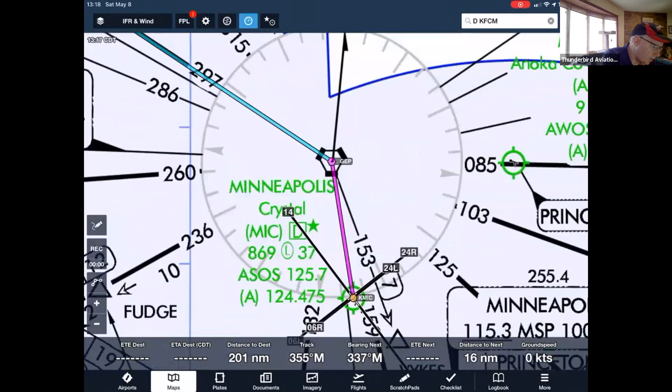So, going to the map, taking off out of Crystal Airport, going direct to Gopher, and then out Victor 2, which is the 297.

So, if the weather is like it is right now at Crystal Airport, where it's 10 miles and clear, and we take off out of Crystal Airport. Well, maybe back up a second. And what the winds are doing, 130. So we're going to take off runway 14 at Crystal Airport, which means we're taking off and going towards the southeast.

We're cleared for takeoff by the tower. We get about 500 feet in the air. Tower goes, fly runway heading, expect on course in 10 minutes, contact departure. When we try to get a hold of departure, we don't hear anything. We've gone through the whole troubleshooting thing, and we still don't hear anything. So we realize that we're radio out.

And so what do we do if the weather is 10-mile visibility and clear of clouds? And there's no clouds in the sky. So now we go back to the route, go back to the regulation. The first part of the rule is if you're VFR, you maintain VFR and land as soon as practical.

So we're going to turn around and head back towards Crystal Airport, get ourselves set up for downwind to runway 14, and hope to see the correct kind of light gun signals when we get on final. Hopefully what we're hoping to see is a steady green light on final, which says we're cleared to land. If we see a steady red light on final, that means give way to other aircraft, continue circling is the official term, but basically it means do a go around, stay in the pattern. You'll probably get the green light on the next time around.

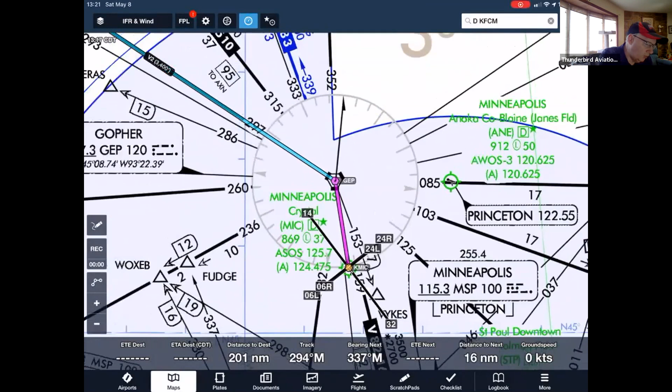Since we're off route, the altitude options are: minimum altitude for IFR operation, altitude to expect in a further clearance, or the altitude that we were assigned, whichever is higher. We were assigned 3,000 feet. We have not been given an expected further clearance altitude. The filed altitude of 4,000 feet doesn't work here. Now we got to figure out what's the minimum altitude for IFR operation where we are right now.

So we were heading southeast away from Crystal Airport. Now we're turning around to go back to Gopher. We are not on any Victor Airways yet. So now we have to look on the en route chart for the OROCA altitude. The OROCA altitude are those brown numbers that are in the latitude and longitude quadrangle.

So for where we are right now, the off-route obstacle clearance altitude is 3,600 feet. Our assigned altitude is 3,000 feet. So at this point, we're going to climb up to 3,600 feet as we head direct towards Gopher.

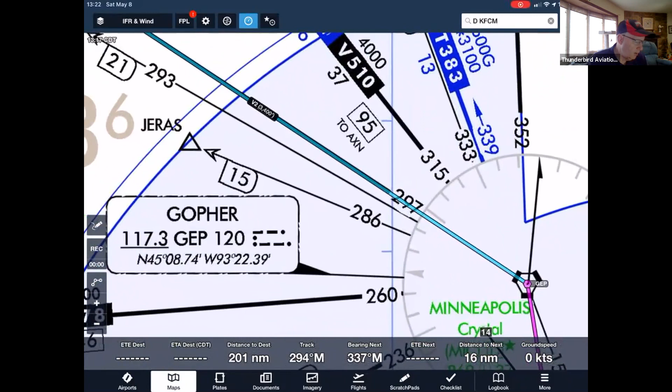Then continuing on our route and altitude situation, when we get to Gopher... there we go. So when we get to Gopher, we're going to start on Victor 2, which is flying out the 297-degree radial away from Gopher. And once we get on the Victor 2 line, we've got to make a choice again.

We're on the route now. We're flying direct Gopher. Now we're on Victor 2, heading towards WIRDE intersection, wherever that is. And now we got to figure out what altitude to fly.

Now that we're on a route, our minimum altitude for IFR operation can either be the MEA or the MOCA. Right now, on this portion of the route, all we have is the MEA. If you notice in the upper left-hand corner, we have 3,400. The numbers without the star next to them are the minimum en route altitude, the MEA. So our MEA, our minimum altitude for IFR operation now that we're on Victor 2, is 3,400.

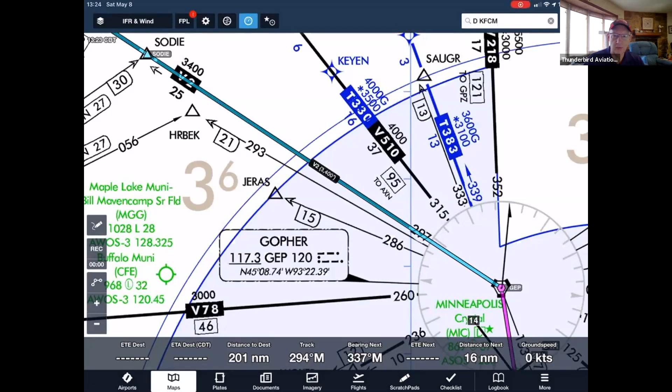We still don't have an expected altitude. Our assigned altitude is 3,000 feet. So once we get onto Victor 2, we're going to descend out of 3,600 feet down to 3,400 feet. We're going to maintain our route on Victor 2 at 3,400 feet, going past all these intersections as we fly along here. And then we get to Alexandria VOR.

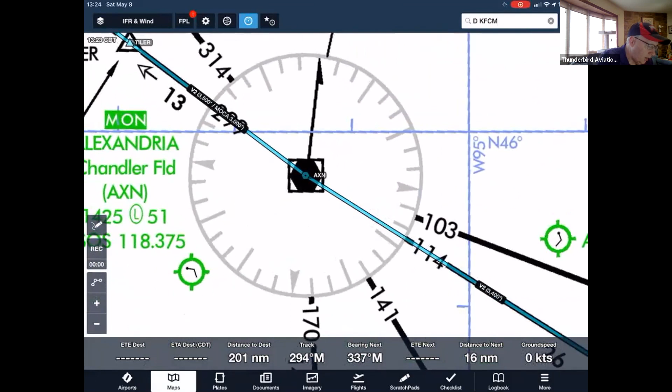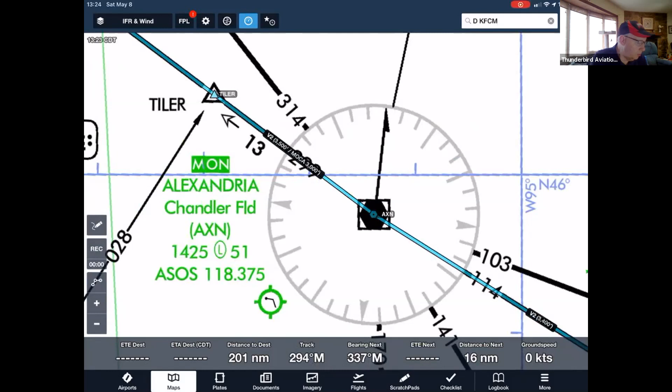Getting to the Alexandria VOR, we're going to continue on Victor 2, but on the other side of that, in the upper left-hand corner of our screen, now we have two choices of altitudes to continue on with Victor 2. The number on top, 3,500, is the MEA. The star number underneath it, 3,000 feet, is the MOCA, the minimum obstacle clearance altitude, which gives us obstacle clearance and nav aid reception within 22 nautical miles of the nav aid we just passed. In this case, Alexandria.

So our assigned altitude is still 3,000 feet. So could we choose 3,000 feet to fly since both those numbers are exactly the same? The way I interpret the rule is you would want to go down to the MOCA if there's a reason for you to go down there.

Just after you pass Alexandria, you look out the window and you're out of the clouds, but then you're back in the clouds. If you go down from 3,400 feet down to 3,000 feet, you're going to get into VFR conditions. You can remain VFR and land as soon as practicable, just like the reg says.

Then I would go down to 3,000 feet, with the situation we have right now where the assigned altitude is only 3,000, so the numbers end up being the same. But if the ceiling in Alexandria is still 500 feet overcast, there's no reason to go down to 3,000 feet. You might as well just climb right on up to 3,500 feet because you're just going to continue on Victor 2.

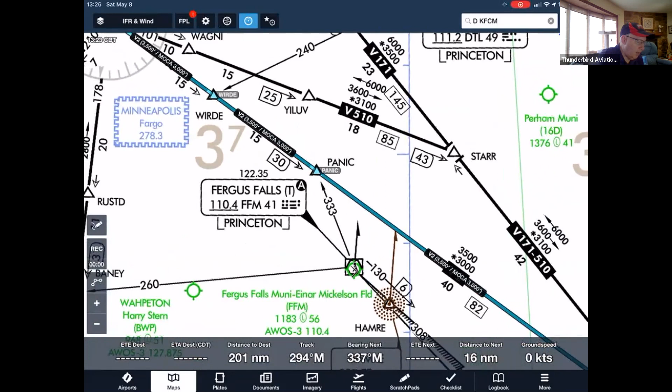As we keep traveling to the northwest, past Panic intersection, and then finally, right there in the bottom of the screen, WIRDE intersection - Whiskey India Romeo Delta Echo. That is our clearance limit.

We did not get expected further clearance after that. So if you look at all the approaches into Fargo Airport, WIRDE is not on any of them, so it's not a point from which an approach begins.

So now we have to go to the second part of that clearance limit rule. It says if your clearance limit is a point from which an approach does not begin, then if you've been given an EFC, you have to hold at WIRDE until the EFC time.

According to everything we've been talking about in this scenario, we have not been given an EFC time for WIRDE. So we don't have to hold at WIRDE - we can just go right past it.

But now, what are we going to fly past WIRDE? Because that's our clearance limit - we don't have any more assigned route left, right? So we don't have an assigned route anymore, and we had not been given an expected further clearance route at any time before the radios died.

So now this is where you would use the filed route. From WIRDE, you're going to continue on Victor 2, go to the Fargo VOR, and then figure out what to do from there.

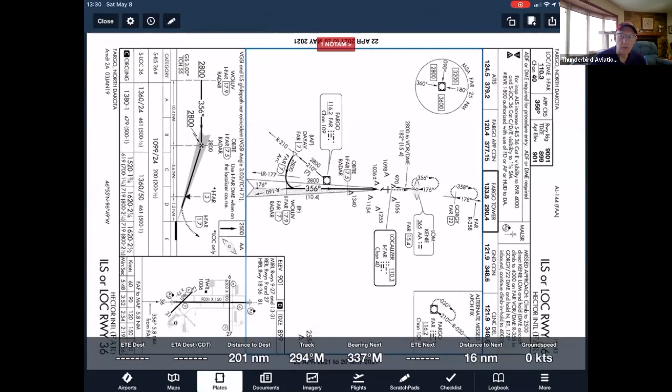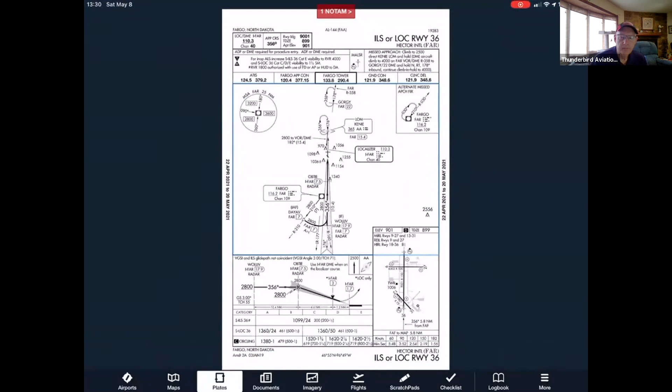So in this situation, I would pick the ILS to runway 36. Let me scoot this around a little bit so we can see it better on your screen there. So there we are.

If we decide to do the ILS to runway 36, then now we're at the Fargo VOR, what are we going to do? Well, obviously we're going to take the 210 radial out of the Fargo VOR, go out to the 7 DME arc, or go out to 7 DME and arc back towards the localizer. During all this time, we're setting up all the appropriate frequencies and everything we need in order to be able to fly this approach.

But what altitude are we going to fly after we get past Fargo? The 2,800 feet there is not part of the approach. The approach starts where the line becomes thick on the approach plate there. The thin line is not part of the approach. So now we still have to work with our altitudes that we have to worry about before.

So the minimum altitude for IFR operation at this point from Fargo out to DAYAV is 2,800 feet, but we've been assigned 3,000 feet. So since our radios aren't working, at this point at Fargo going out to the 7 DME arc, we're going to fly at 3,000 feet.

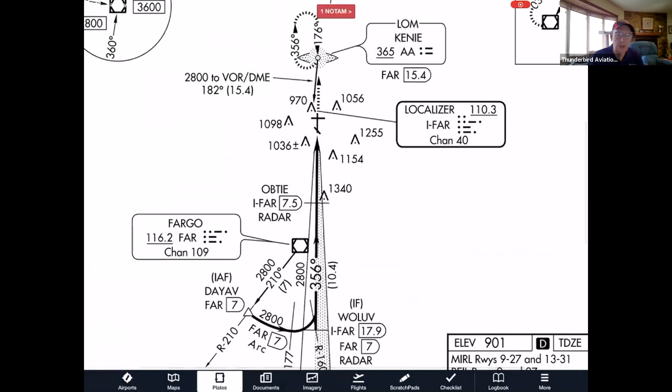Once we get to DAYAV and turn onto the arc, then we can go down to 2,800 feet. Fly the arc around until we intercept the 356 degree on the localizer and go down here to the bottom, maintaining 2,800 feet till OBTIE intersection, which is both the final approach fix for the localizer, the Maltese Cross there, and the ILS final approach fix, which is the lightning bolt symbol next to the 2,800 foot there.

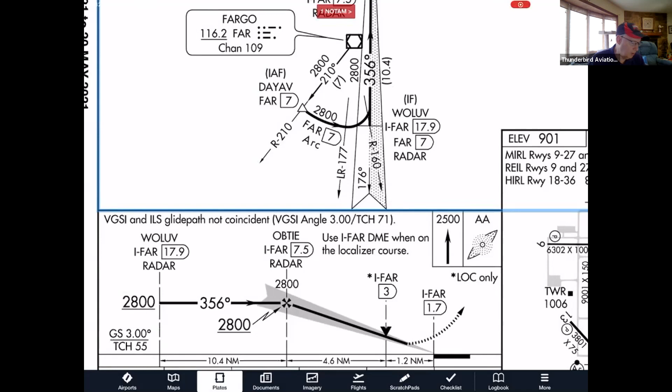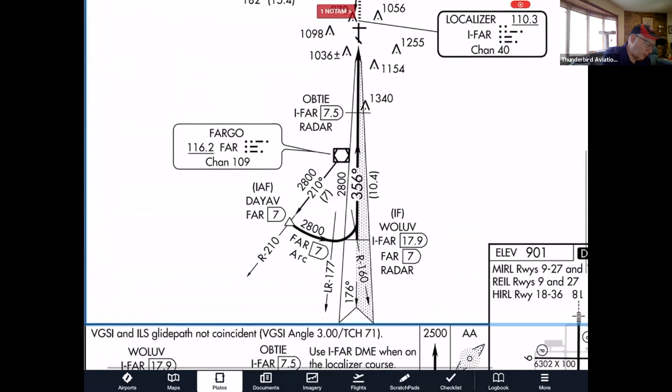So at OBTIE, we're going to start on down from 2,800 feet, after intersecting the glide slope, following that altitude all the way down to the straight-in ILS minimums of 1,099 feet. So we've been doing our very, very best to maintain the big plus on the gauge there, so that we're on localizer and on glide slope, and we're all the way down to 1,099 feet. Now what?

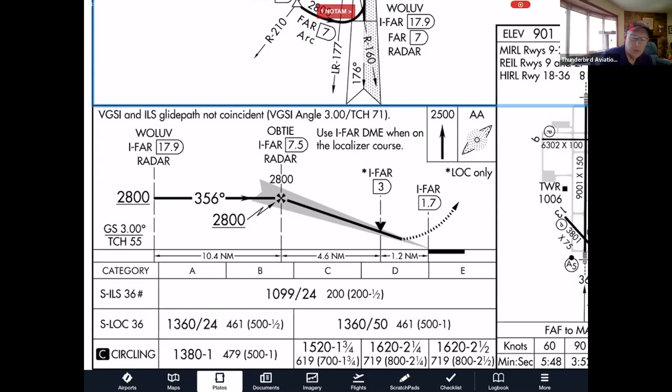So need to switch back here.

So now we're at 1,099 feet at Fargo Airport. Now we have to figure out, can we land? Can we descend below our decision altitude or the MDA? So 91.175 is the regulation that talks about takeoff and landing in IFR situations. But the first part of the regulation talks about the landing part rather than the taking off part.

So the first thing we have to realize is we must be continuously in a situation where, using normal maneuvers and normal descent rates, we can descend on down to the runway. That's what the reg says. In the airline world, they have a different sort of term for this. They call it a stabilized approach.

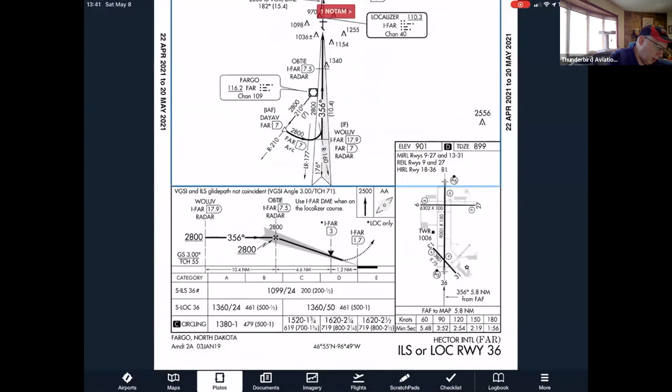So let's go back to our Fargo situation here and see how we apply this rule to the situation. So here we are coming into runway 36 at Fargo Airport. So we see approach lighting systems labeled as an A5.

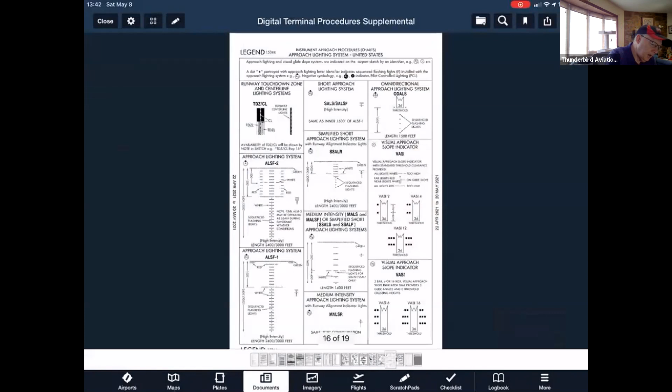Stand by a second. I'll refine my situation here. A5, according to the explanation in the front of the approach plate book, is a medium intensity approach lighting system with runway alignment indicator lights, nicknamed MALSR. Well, what do the lights look like? Well, they look the same as SSALR.

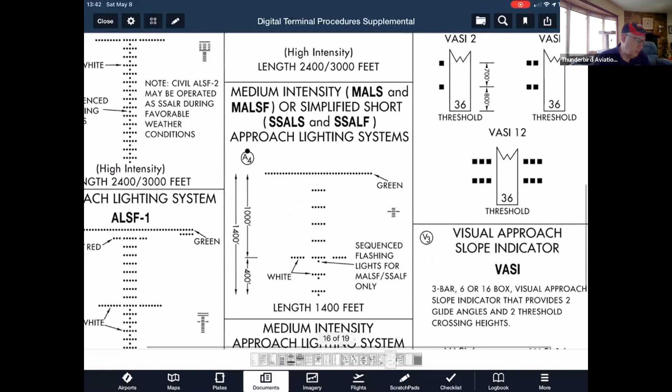So if we go up here to the SSALR explanation, all the lights in the approach lighting system are white. The green lights you're seeing in that picture right there are the threshold lights. So we got sequence flashing lights, we got white lights. So if it's an A5 on our approach plate, we're never going to see red lights. So we can know right away that if all we see is approach lights, the only thing we can do according to the rule is descend down to 100 feet above touchdown zone elevation.

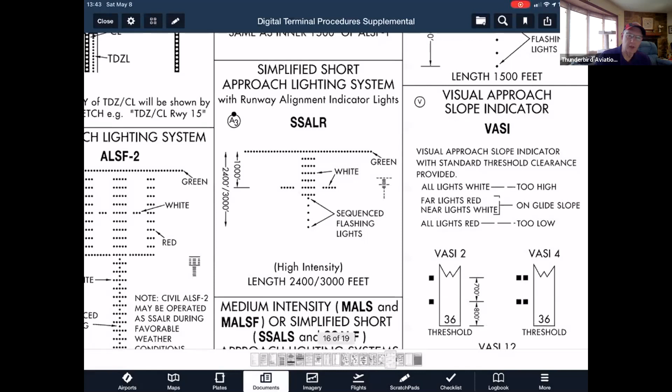And then hopefully you see one more thing on that list. Move over just a little bit. The one with the red sidebars here that I just put on the middle of the screen is an ALSF-2 system. On the approach plate itself, it has a circle with an A in it. And right below that is the ALSF-1 system, which has the A1 designation, and this is the one with the red terminating bars.

So if you're flying into an airport and you look down at your approach plate and you see any other A in the circle except for A or A1, then it's only going to be a white approach lighting system, and you can be preset in your mind that if you see approach lights only, you're going to be going down to 100 feet above touchdown zone elevation. The ALSF-1 and the ALSF-2, the A and the A1 on the approach plate, are the only ones with the red sidebars or the red terminating bars.

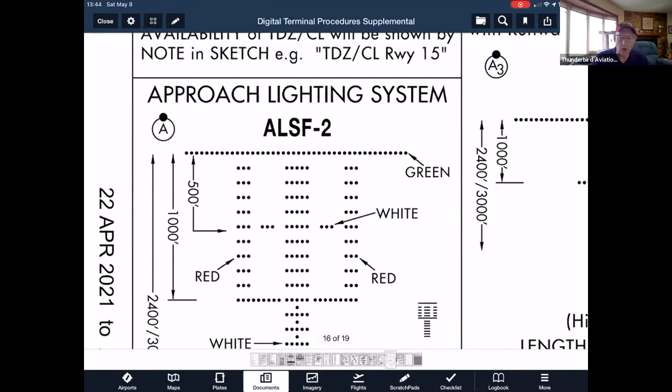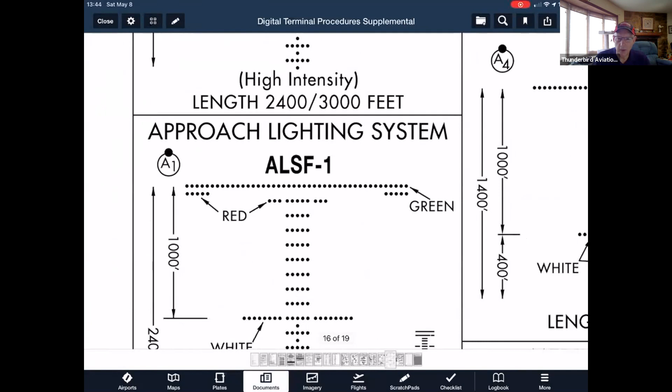And so if you only see white lights, but you know that you're going to have this, if you get in a little bit closer, then you see the red terminating bars or the red sidebars, then you can continue all the way down to the runway. You just put your airplane right between the red sidebars or right in the middle of all those red terminating bars and keep going until you see the runway. Just keep on coming down.

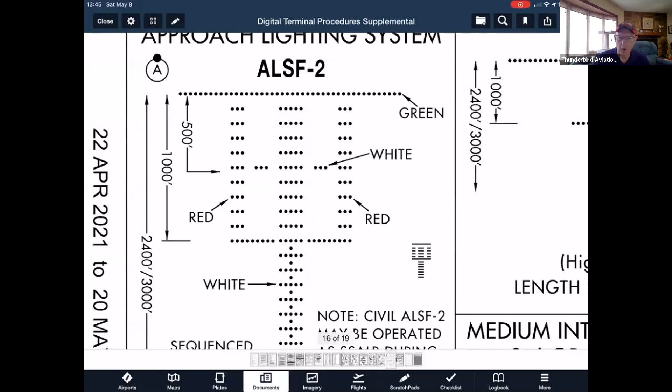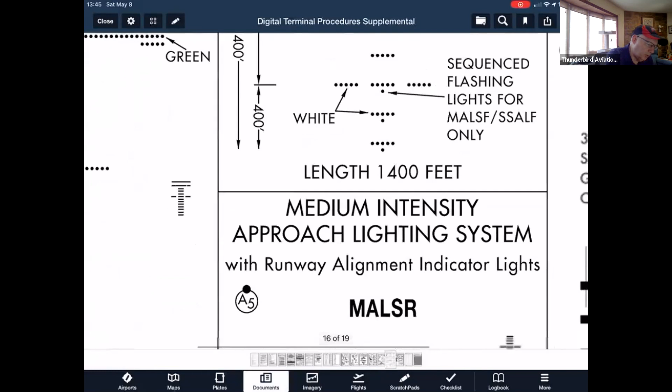The only airports that have ALSF-1 or ALSF-2 are the big airports. I think the only one in our area here in the Twin Cities in Minnesota is Minneapolis. They might have these up at Duluth. I haven't looked there in a while. But most of the airports that I fly into, as far as training airports are concerned, have the A5 MALSR system, so we know that it's always going to be white lights.

And while we're on this page here, let me move up to this upper corner here. If you're looking at the airport diagram on the approach plate, and you see dots down the middle of the runway, that means that in addition to the side lights on the runway, they also have runway center line lights. And if they have the lights listed on the side there, they also have touchdown zone lighting. Again, this is usually for big airports,

just because in order to get runway center line lights and touchdown zone lights on the runway itself, they have to dig into the runway. They'll usually put this in as they're building the runway in the first place, so they can put in the lights, then put in the concrete, so that they'll always be there.

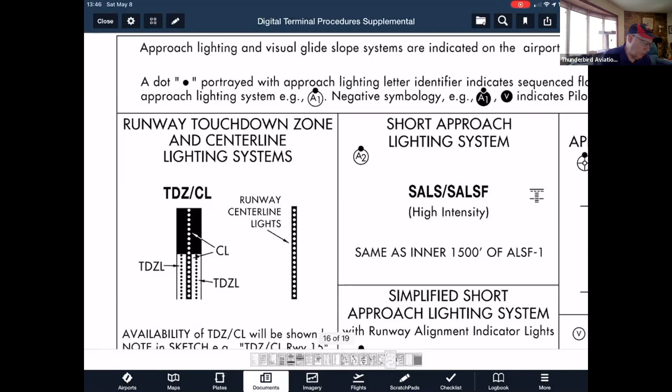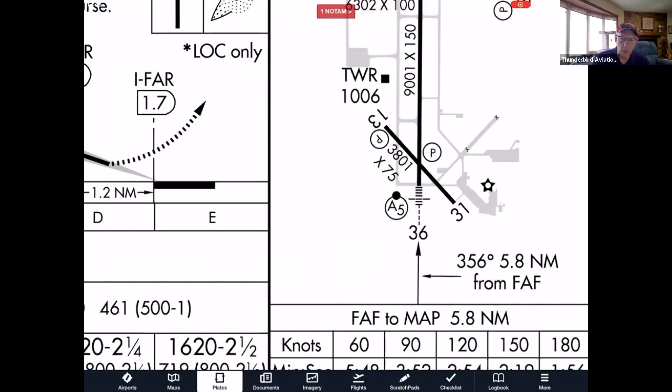So going back to our approach plate here, we notice that there are no dots down the middle of the runway. There's no white spots with the black dots anywhere near the runway. So we don't have runway center line lights. We don't have touchdown zone lights, but we do have the approach lighting system here. And at this point, all we're going to see is white lights. So in this situation, going up to the top, touchdown zone elevation at this airport is 899. So if all we see is white approach lights, we're going to descend down to 999 feet.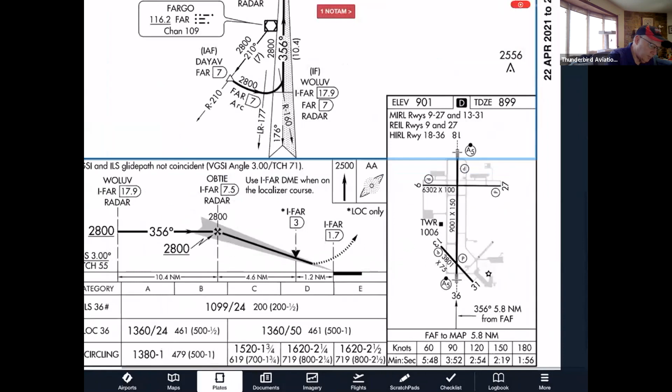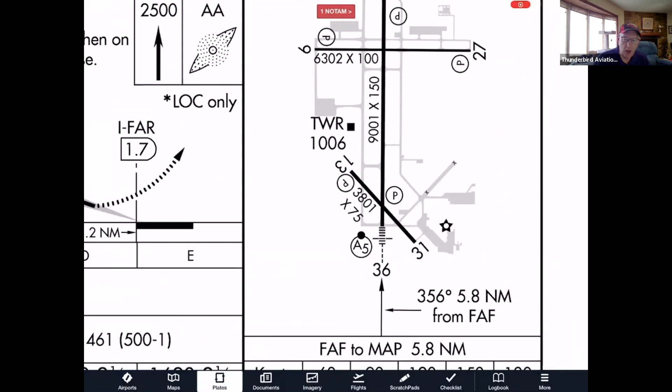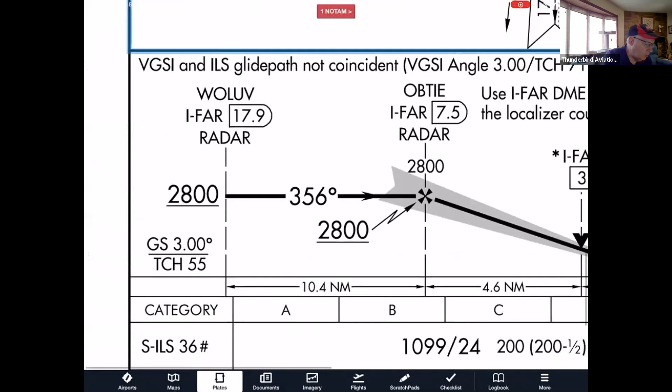So which visual glide slope indicator are we going to have at this airport? It's going to be a PAPI. That's the 4 dots all in a row. For on glide path, like we're supposed to be on the glide path here, we're going to be close, but not quite. The VGSI and the ILS glide path are not coincident. So we may or may not see 2 whites and 2 reds, but if we see the PAPI lights of any type, we can continue all the way down to the runway.

So at this airport, the runway is obviously that. The runway markings will be the number 36. The runway lights will be the lights down the side of the runway. At this airport here, they'll start out as white lights, and then 2,000 feet before the end, they'll turn amber, since the runway lights down the side change from white to amber.

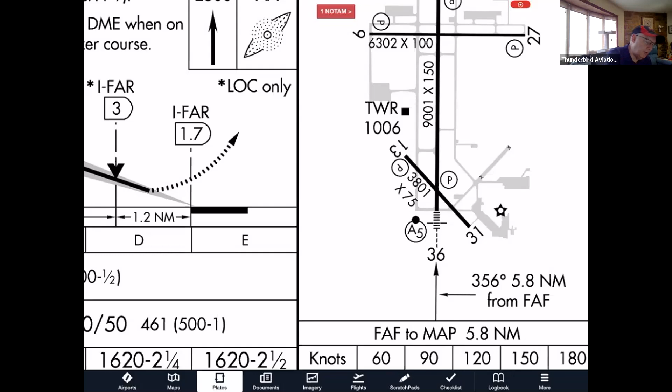Since we have approach lights into this runway, we won't have runway end identifier lights. The only runways with runway end identifier lights are runway 9 and 27, because the approach lights and runway end identifier lights are mutually exclusive. They won't put both of them on the same runway. So we won't see REILs in this situation. All we'll see is the approach lights.

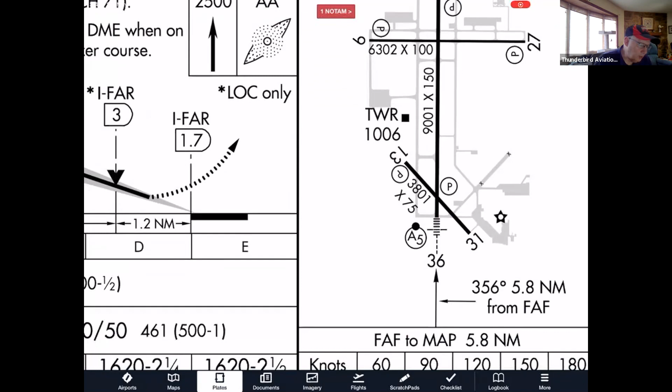So if we get down to 1,099 and all we see is the approach lights, then we're going to go down to 999 feet and hope we're going to see at least the runway markings, the threshold markings, the touchdown zone markings, the PAPI lights. There was one time I was coming into Flying Cloud Airport. They said that it was a 200-foot ceiling, 4 miles visibility. So I figured I'd be able to fly the ILS runway 10 right, get down there and see the entire airport because it's 4 miles visibility.

I got down to decision altitude on the glide slope. I looked up and all I saw was approach lights. So just like I always did myself, memorize the 2 numbers. I'm back inside, keeping my descent rate going, keeping the glide slope centered, keeping the localizer centered, going down to 100 feet above touchdown zone elevation. I looked up and all I saw besides approach lights was white, white, red, red of the PAPI lights. And so I just stayed on the white, white, red, red with my head outside the cockpit. And at the last second, the runway came out of the mist, like Brigadoon, for those of you who are musical fans. Anyway, so you can put PAPIs on that list.

If you see the PAPIs, the visual glide slope indicator, then you can go all the way down to the runway. The nice thing about the picture is it tells you that the PAPIs, in this case here, are on the left side of the runway, so you're going to be looking for the runway to the right of that. All these things would be stuff that you would be looking at the entire time you're flying, not talking to anybody, with your radios out all the way into Fargo.

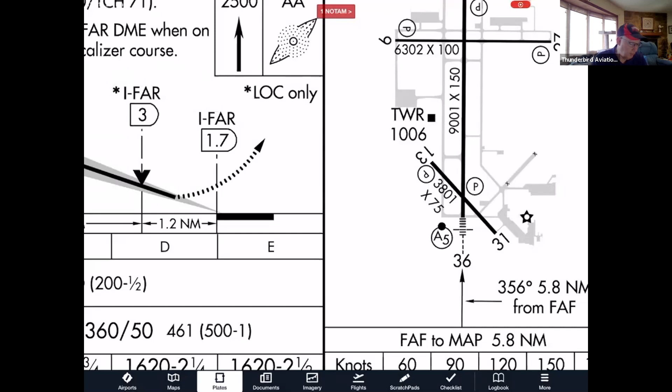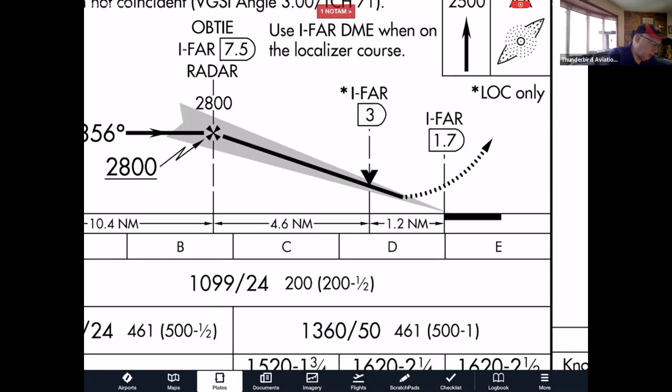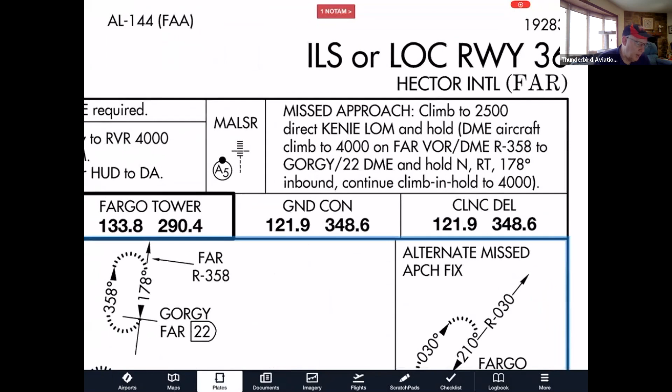But now we're at 1,099 feet. So backing up in our approach here, we just now got to 1,099 feet. We look up and we don't see anything. So now what do we do? Well, first off, fly the missed approach procedure. Climb straight ahead to 2,500 feet and go out to AA, whatever that is. So let's go back up to the verbiage at the top here. Climb to 2,500 feet, direct KENIE locator outer marker and hold. In a DME airplane, we could go out to GORGY if we wanted, but so we go out to KENIE, do a parallel entry, but now what?

If our radios still aren't working, what do we do? The answer is go to your alternate. This is why if you have to declare an alternate airport, you want to make sure that the weather at that alternate is good enough for you to be able to go in there and land.

So the regulation says if the alternate has a non-precision approach, the weather at the time you arrive there must be 800 and 2. If it has a precision approach, the weather at the time you arrive can be as low as 600 and 2. You can, according to regulations, pick an airport that doesn't have an approach, but then you must be able to descend in VFR conditions from the nearest MEA to land.

So in that situation, personally, I probably would never pick an alternate that doesn't have an approach. But you want to make sure, and maybe even a little bit better than 800 and 2 or 600 and 2, for the alternate you want to get to.

Because if you get to this point and your radio's not working and you have to go missed approach for whatever reason, whether it was your fault or the weather's fault, your only choice is to fly to your alternate. So when the radio's working, everything's negotiable.

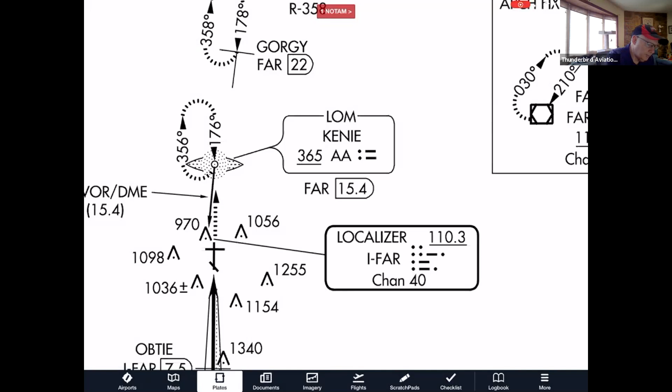So now, back to here. Now, wait a minute, before we do this.

So I'm just looking at the chat stuff. Yes, unable, do not accept the clearance that does not have the destination as a clearance limit. That is always an option.

This is just a scenario that I use to ask the students in their instrument courses, to make sure they know the rules and stuff.

And somebody else says, always underestimate your estimated en route time so that you don't have to worry about holding. That's always something that's very good to do.

So for an IFR approach, if it says it's going to take you 2 hours to get there, tell them you're going to get there in an hour and a half, so that if you do lose your radios, you can just continue right on in and fly the approach.

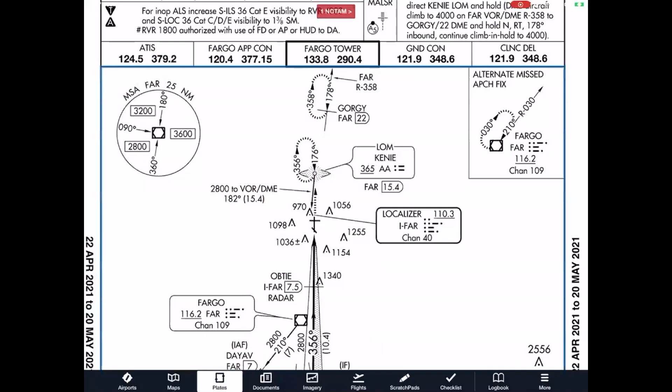Okay, now you said that if we're at 3,000 and our clearance limit is the VOR, that's where we're going. You said we have to depart the VOR at 3,000, not 2,800, because that's not where the approach begins. That's correct. Okay, I agree with you that DAYAV is noted as the IAF, the initial approach fix, and the

VOR is not. However, since we have a published transition from the VOR along that 210 degree radial, defined by 2,800 feet and 7 miles, I believe that is part of the approach procedure, and that's where the approach begins for transition purposes. So let's say our assigned altitude was 10,000 feet.

How are we going to get from 10 down to 2,800? We're going to have to spin in a hold somewhere. So I see nothing wrong with departing the VOR at 2,800 feet if that's where we were burning time until our estimated time of arrival is adjusted, and so on and so forth.

Which can all be avoided by underestimating our EET, as we talked about earlier. Yeah, no, that makes sense. That makes sense.

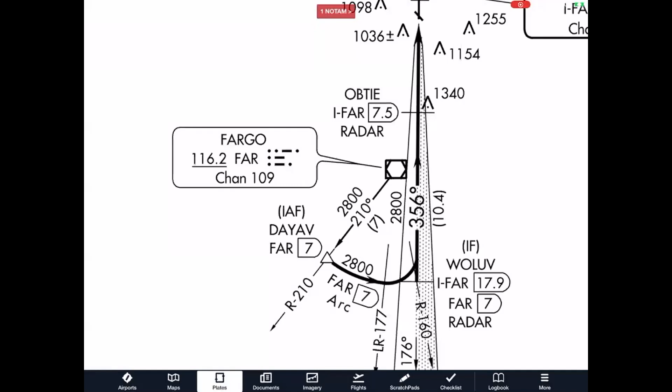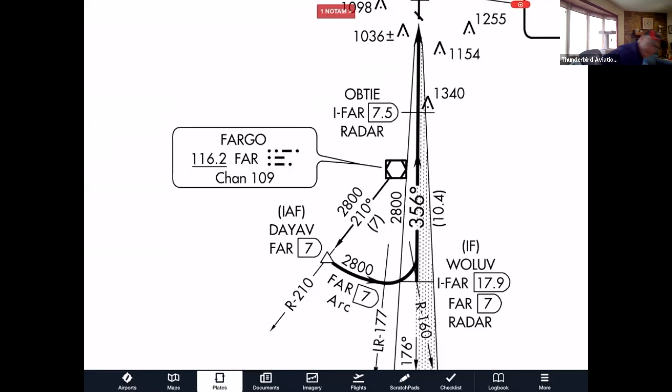Okay, can you hear me? Loud and clear. Yeah, I didn't have any specific destination airport in mind, but in some sense this is an incident. I was just wondering, whether we're going into a non-towered airport or even a towered airport, do we have to file anything—any report with the FAA describing what happened and what we did—or is everything cool once we've landed and advised the FAA that we're on the ground at a non-towered airport, or do they know it already if we're at a towered airport?

Yeah, in that situation, if you're getting on the ground at a non-towered airport, it's just like when you're flying VFR—you're going to have to get on the phone to 1-800 weather brief and tell them that you're on the ground. Right, close the flight plan.

Now, whether you have to do any reporting after that or not, this is not a reportable incident as far as the regulations are concerned. ATC may want to talk to you about something, but as far as reporting it to the FAA, I don't think that would have to happen.

Okay, thanks. No problem. I'd recommend that if you're doing this under IFR and talking to Leidos, have them relay to center or approach that you are safely on the ground. Wait on hold until flight service tells you they've confirmed